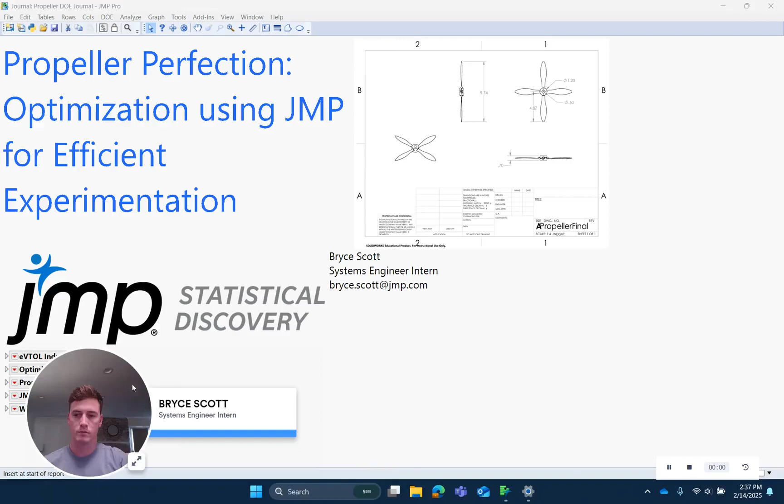Welcome to my presentation on propeller perfection, optimization using JMP for efficient experimentation.

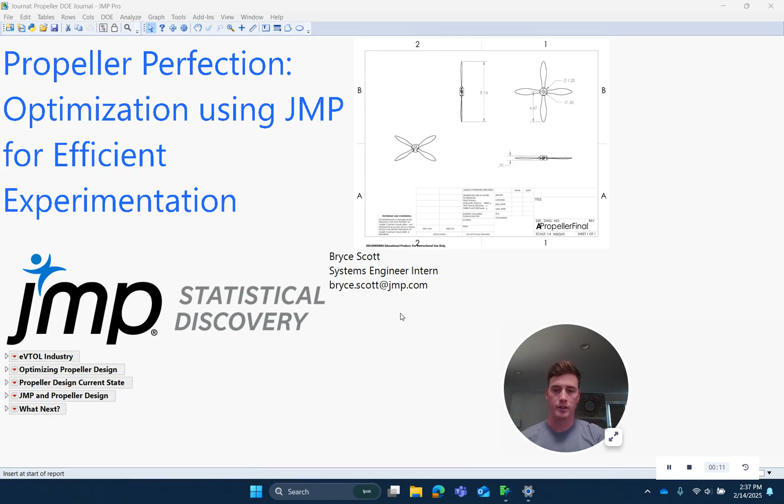Just move that over.

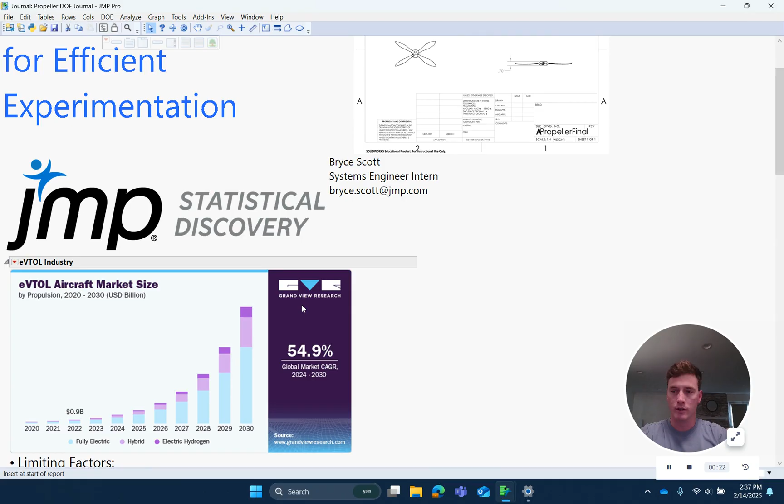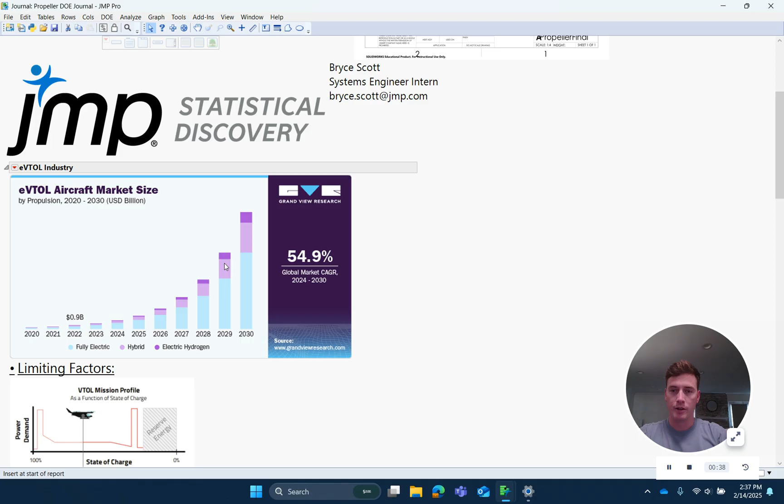All right. So why do we need a perfect propeller? Why is this relevant to us? So this graph over here demonstrates just how the eVTOL market is increasing, almost exponentially. Currently, we are right here, 2025, but if you can kind of see the way that we're growing, the need for propellers is pretty evident.

Now, why do we need efficient propellers? So this graph over here kind of just explains to you the need for power throughout a typical mission profile of an eVTOL aircraft, or just any VTOL aircraft for that matter. So these two red bars, you might be asking, well, what are those? That is takeoff and land.

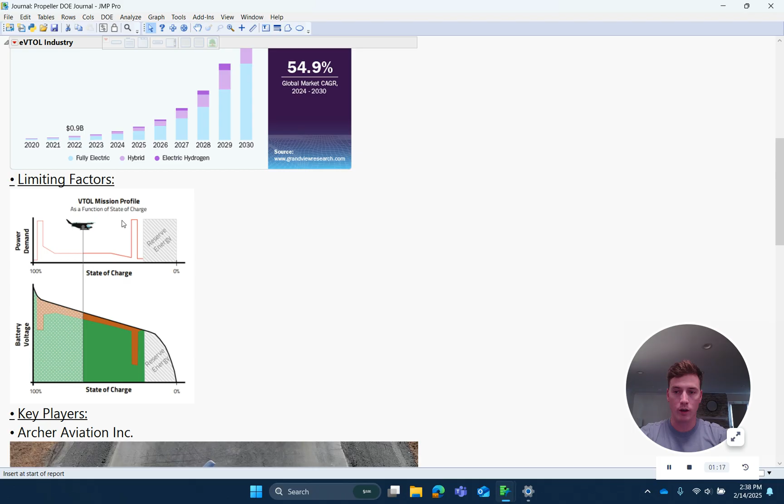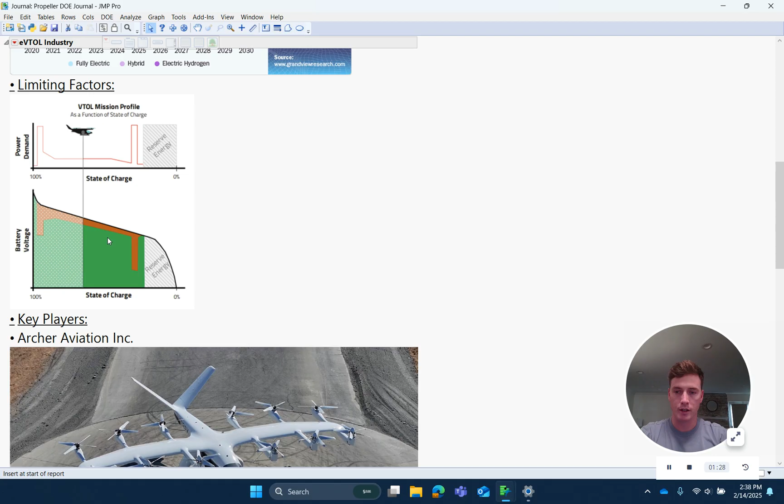So that's where the aircraft takes off and lands vertically, and it 100% relies on the propellers to lift the entire weight of the aircraft for takeoff and then achieve a hover and descend for landing. So you can see that we really need a lot of power during these two times of flight. And over here, we can kind of see how the battery voltage drops as we go throughout the mission profile. And again, you can see the two red bars for takeoff and land.

All right. So who is this relevant to? Here's some of the key players in the eVTOL industry, and Archer Aviation, I would say, is probably at the forefront of this. So you might be asking, well, why do we need efficient propellers? Well, as you can see, the Archer aircraft over here has 12 propellers. All 12 of them are used for takeoff and landing, and that's really where that high power draw is coming in.

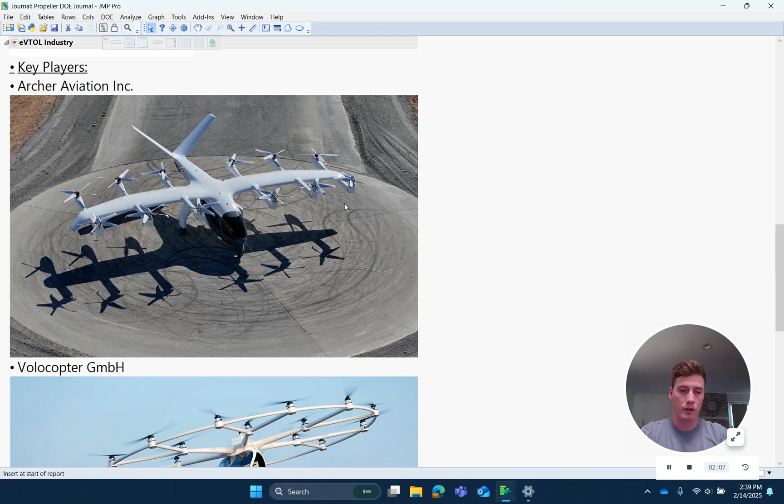And then during forward flight, these front 6 actually rotate forwards and the back 6 turn off. So not as important there, but really in takeoff and land, you've got all 12 propellers lifting the entire aircraft. And here we've got a German company, Volocopter. Theirs is quite a different concept to the Archer, but you can see it's got 14 propellers, and none of these tilt forward. So at all times, all 14 of these are lifting the entire aircraft.

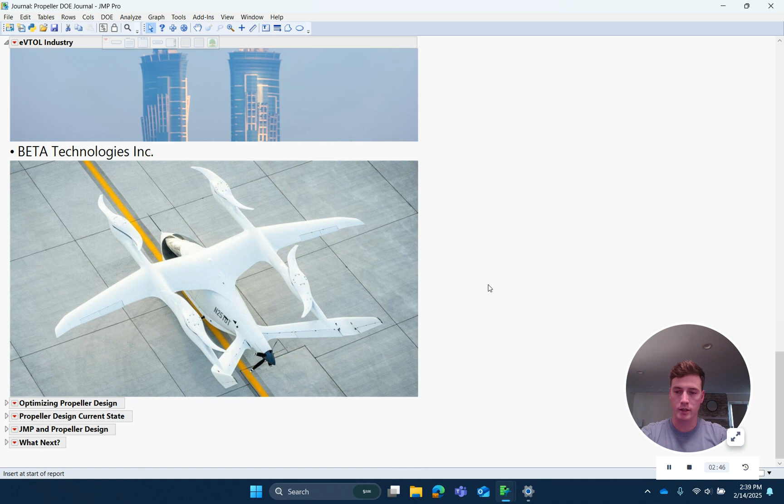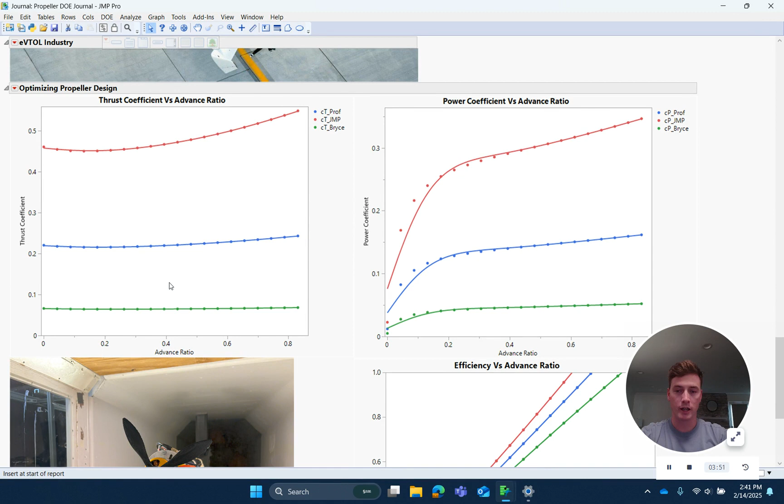I then went to one of my professors and said, you're an expert in the industry, tell me what you think the most efficient propeller is. And they came up with this blue line. I then did it myself. After a couple of years of schooling, maybe I can design the most efficient propeller. And what I came up with was this green line.

So if I scroll down over here, here's my efficiency curve. And I can see that the red line, the JMP propeller, beats the professor's propeller and my propeller at all stages for efficiency. And this over here is just a picture. We actually 3D printed this propeller, and we're able to test it as well. So here's a physical representation of the actual propeller.

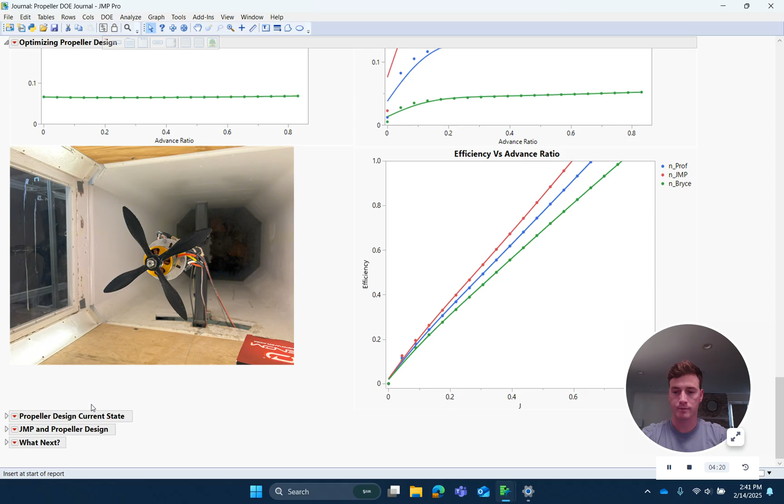Right. So currently, if you were to design a propeller, this is probably what your workflow would look like. You would have some kind of variable range. You would make some kind of assumptions to make your analysis a little bit more simple. You create a data table. You would maybe write some kind of MATLAB function, and then you would do your testing.

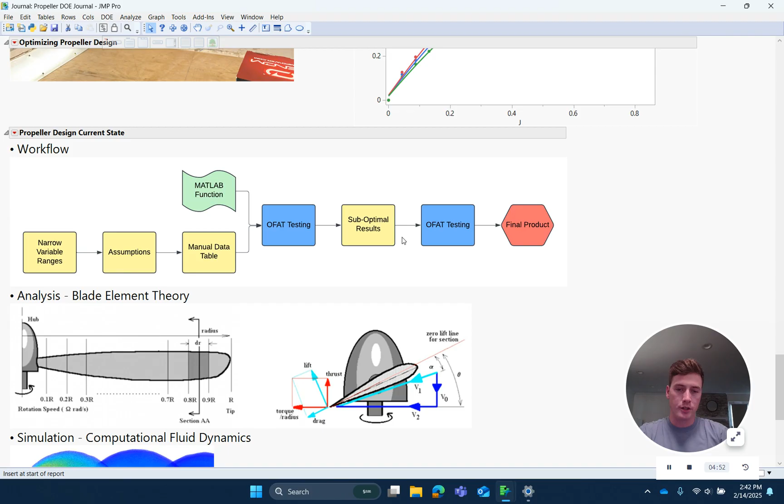And since testing like this is quite difficult, you would most likely do something called OFAT testing, which is one factor at a time. And this is what we at JMP are trying to eliminate, this OFAT testing. Then you would achieve some kind of result set, and you might go through another round of testing. You would then get to a final product.

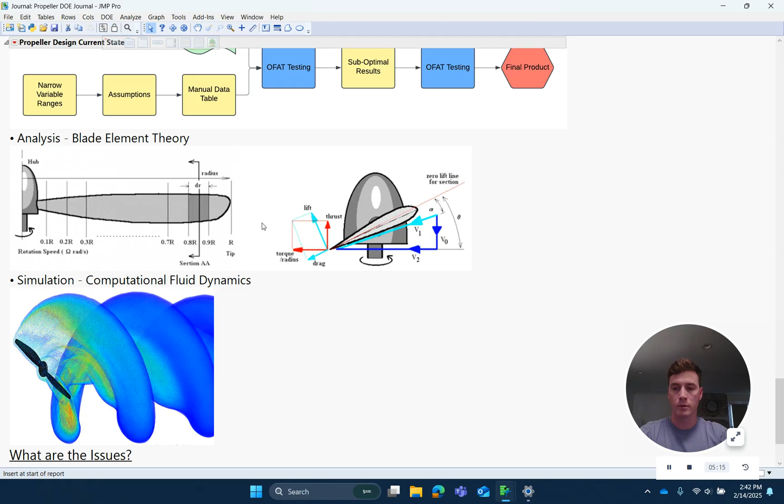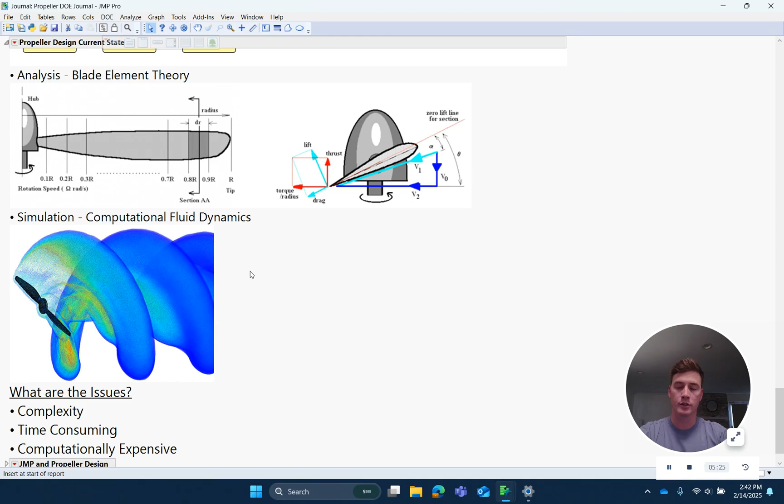Now for the analysis, there's a lot of different ways to analyze a propeller. The one that we chose for the purposes of this project is something called blade element theory. So this is just an analytical method to mathematically solve for the thrust and power draw of a propeller. And if you were actually doing this in the real world, you would want to employ some kind of higher fidelity physics solver, and that would be some kind of CFD package or just some kind of fluid solver to be able to do this for you.

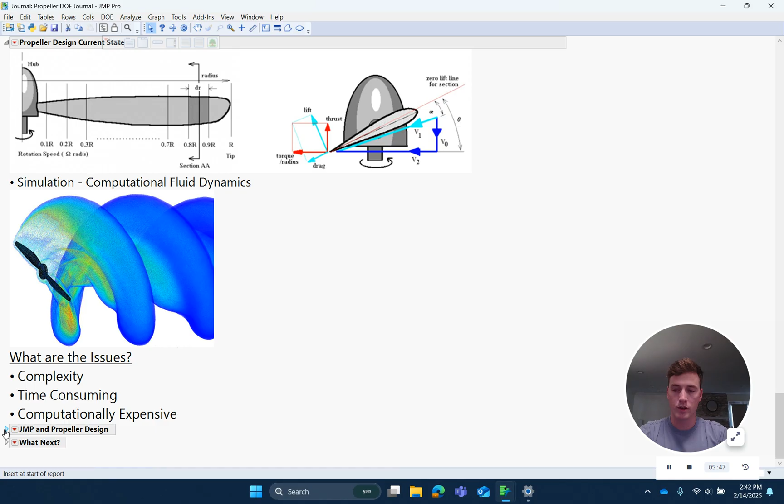So what are the problems with this? As mentioned before, it's very complex. This kind of analysis is very difficult to do. It's very time consuming. Some of these CFD analyses can take hours, if not days, to run. And it's very computationally expensive. There's quite a high cost associated with this. So what we're trying to do is make a more efficient way that we can do this.

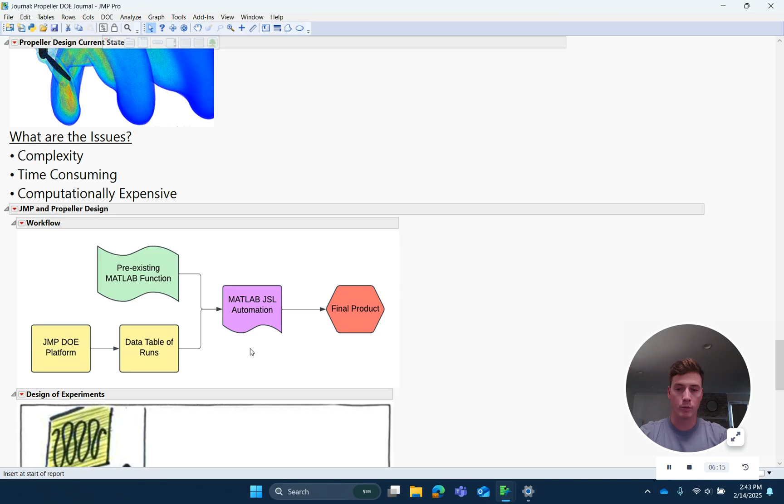So this is the workflow that we're trying to get to. Now, the complexities of the previous workflow, we've eliminated those and we've introduced this purple block over here. Now, if you want to learn more about exactly how we did that and exactly how we combined MATLAB and the JMP scripting language, there'll be another video that you can click on to go and watch a step-by-step instruction set on how to do that. But for the purposes of this video, we're going to move on with the presentation.

So what we used is design of experiments. So you might be thinking to yourself, well, what is design of experiments? Imagine you are these two professors or mad scientists, and you have some kind of output, which is this line, and you have these levers, which are the other inputs. Now, let's say you want this line to be as straight as possible. So you might move lever number 1 down, and randomly the line goes straight. So you think, okay, well, lever 1 has to be down.

But then you move lever 2 up, and now the line is skew again. But you thought, well, if lever 1 is down, the line must be straight, so lever 1 must be down. But there's some interaction going on between lever 1 and 2. Now, if you were doing OFAT testing, it would be very difficult to get these interactions by doing just one factor at a time. And if you had a lot more than just 5 levers, it would be impossible to do.

So this is where DOE really comes into play. Using a designed experiment, you're able to get information on all of your factors and the interactions of those factors in as few runs as possible. And that's what we went ahead and did.

So if I open our data table over here, we can see that we have about 6 factors, and we already have our results populated in this. But if I scroll down, you can see that we have 60 runs. And then we have some of our efficient settings appended to the bottom, row 61. So this is what we're trying to get to, right?

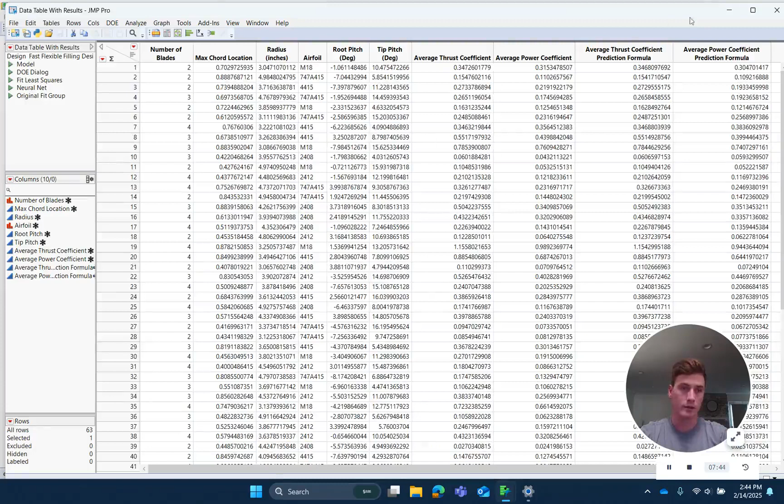So if I go ahead and I fit my model, this is something called the JMP profiler. So this is your what-if settings. What if I change my max chord location to 0.74? Then JMP is going to give me a predicted value for average thrust coefficient of 0.478 and a predicted value for average power coefficient of 0.44.

Right? So now what you can do is you can tell JMP, well, I want my average thrust coefficient to be as high as possible, and I want my average power coefficient to be as low as possible, really maximizing my efficiency. So you can tell JMP to do that, and then you can go ahead and click maximize desirability. And then JMP will go ahead and it'll change all those settings for you.

And there'll be a trade-off because you'll need to maximize thrust and you'll need to minimize power. And you will then be able to get the optimal combination of those two settings. And in order to achieve those settings listed in red on the left, you will need to change your variables to these numbers at the bottom here, which are your most efficient settings.

Now, what do these gray bars mean, and what do all these squiggly lines mean? So the gray bars are the error bars. So you want those to be as tight as possible. So in this case, we've got pretty good error bars. And the squiggly lines are just telling me how my variables react with each other.

So again, like I mentioned earlier, this is my what-if playground. So if I move these, you can see how everything else is adapting to the change that I've made. And the fact that the shape and the curve of those other lines is changing is telling me that I have some kind of interaction between factors. And I can change any of them.

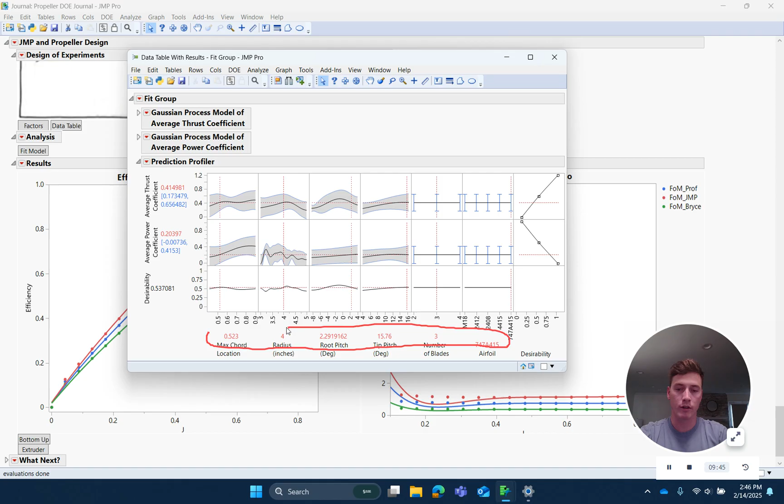What if for some reason I knew that my number of blades had to be at 3, right? I could just put that at 3. And I knew that my tip pitch had to be at 15. I could just change that. And then JMP will automatically update the other settings, and it'll tell me what I need to set everything to in order to achieve the best results possible.

All right. So just to reiterate some of the conclusions we were able to achieve using the DOE and using our new integrated JMP workflow, you can see that at every point along my efficiency curve, this red line is outperforming the professor's blue line and my green line, meaning we did a good job. We have an efficient propeller at every step of the way.

Now, a very common analysis tool used in the aerospace industry, particularly for propellers as well, is something called figure of merit, right over here. So we can see that our figure of merit, the red line, is above the blue and green line, again, every step of the way, which essentially is just telling us you've designed a good propeller and you've designed an efficient propeller.

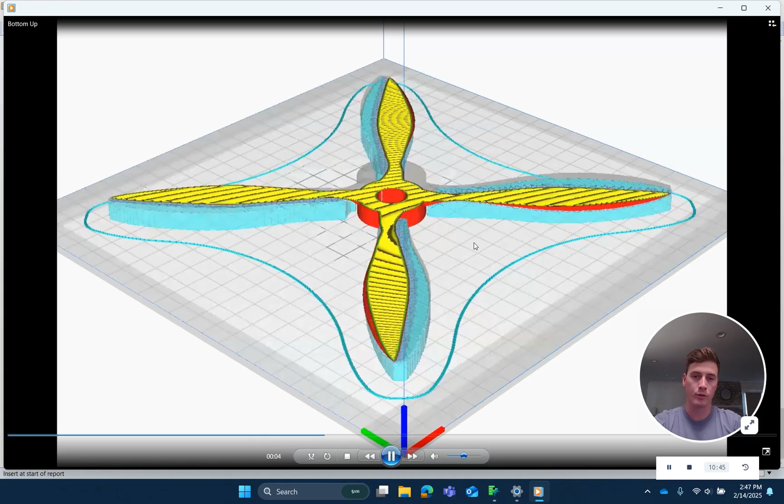So I showed a picture earlier of the 3D printed propeller, and what we're able to do is show you just a quick simulation of what it looks like as it goes through every layer within the 3D printer. And if you wanted to learn more about 3D printing, JMP has a video about that as well. And we're able to also follow the extruder toolpath as it prints every layer of our propeller. So you can see it starts on the outside, just filling everything in, and now it'll outline the entire propeller, and then we'll see it'll fill in as you go along.

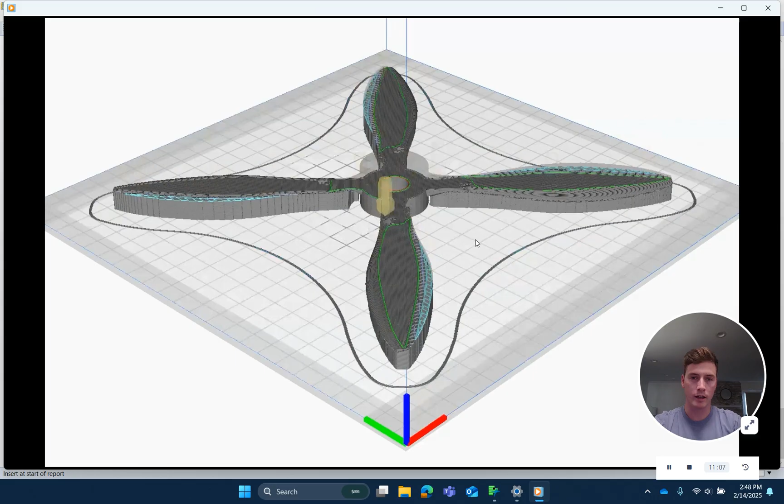Right, so you might be asking yourself, well, this looks great. What next? What do I do? I want to implement this into my workflow.

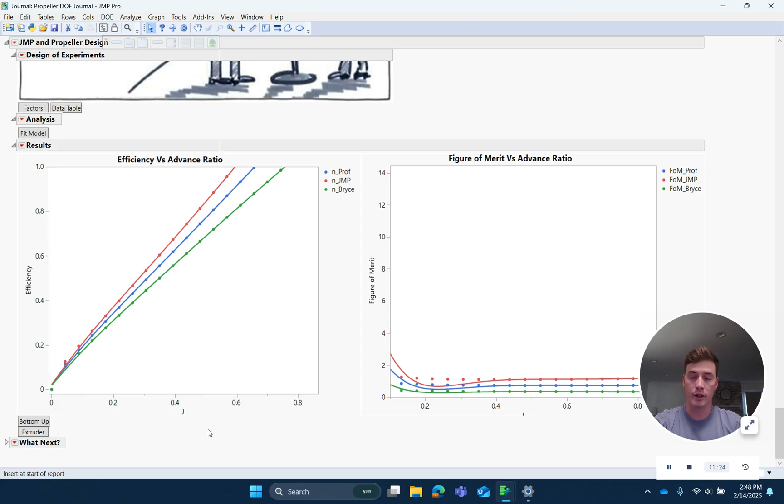And you can implement all of these into your workflow, whether you are designing propellers or whether you're designing complex manufacturing processes. You can use DOE and you can use JMP to optimize any of your workflows.